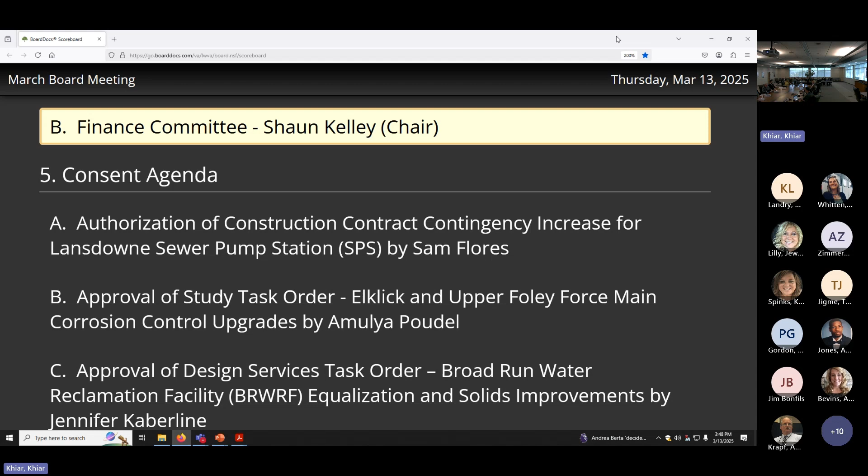Aye. I'm taking that. Aye. Oh, we have Mr. Bonfils, Mr. Bonfils, a voice from above.

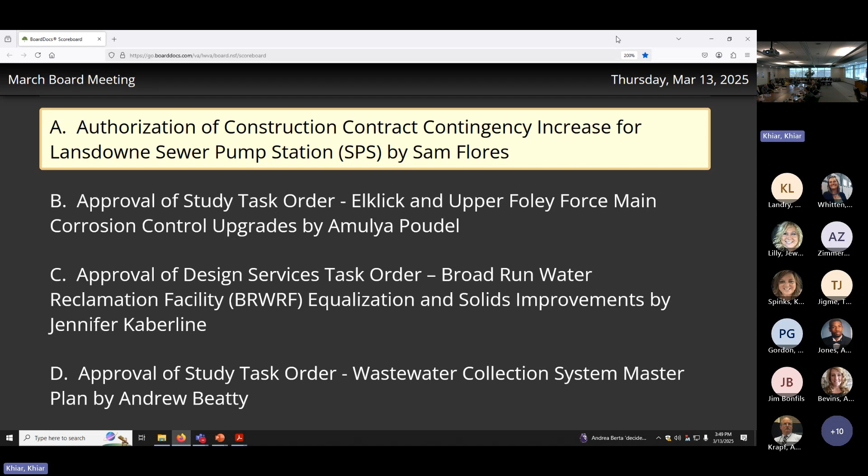Combined capital construction quarterly report, fourth quarter '24 change order report, and 2024 report by Mr. Zapfel and Mr. Flores. They look so close right there sitting with each other.

Thank you, Mr. Allen. Good afternoon. It's a privilege to come before the board to provide an encore presentation to our CIP committee meeting quarterly report for the fourth quarter of 2024.

I'll probably start by acknowledging that we are speaking about the fourth quarter here in March, and that's by virtue of some slippage on the typical committee meeting schedule. Rick and I will shortly start working on the Q1 report to provide for the committee here in April. But in fairness to keeping that one interesting, we will stay faithful to the reporting timeframe and avoid any spoilers, as it were, for what's gone on during the past couple of months here.

The agenda will include project snapshots, brief reports on the lab HVAC project at Broad Run, followed by the water booster station improvements at Dulles South, a little bit of a deeper dive on the Milestone Reservoir and Pump Station project, followed by Mr. Zapfel's presentation on the Broad Run Phase 2 expansion, and then lastly, some quarterly report facts and figures for Q4 of last year.

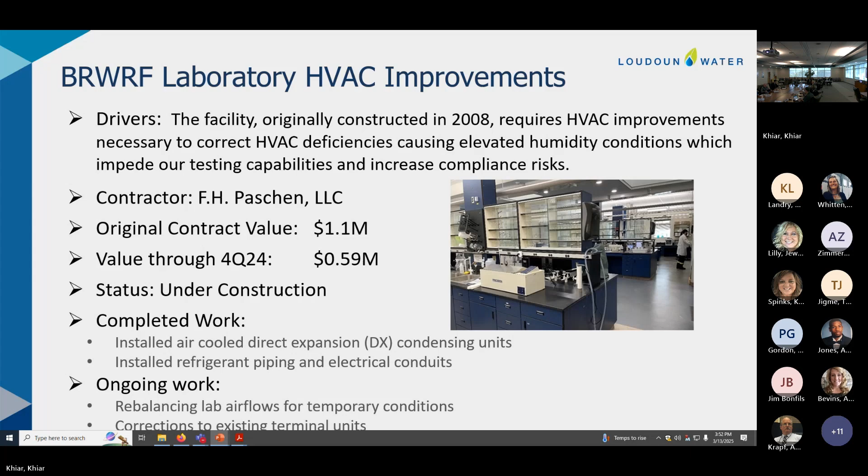The next project I'll present on is Dulles South Water Booster Pump Station upgrades. This one also started in the spring of last year. It's scheduled for completion around the fall of this year. On schedule so far, a little bit of a slower ramp up for this one due to some longer lead time items and some work we have to coordinate within certain seasonal constraints, but so far proceeding well on schedule and within the approved construction budget.

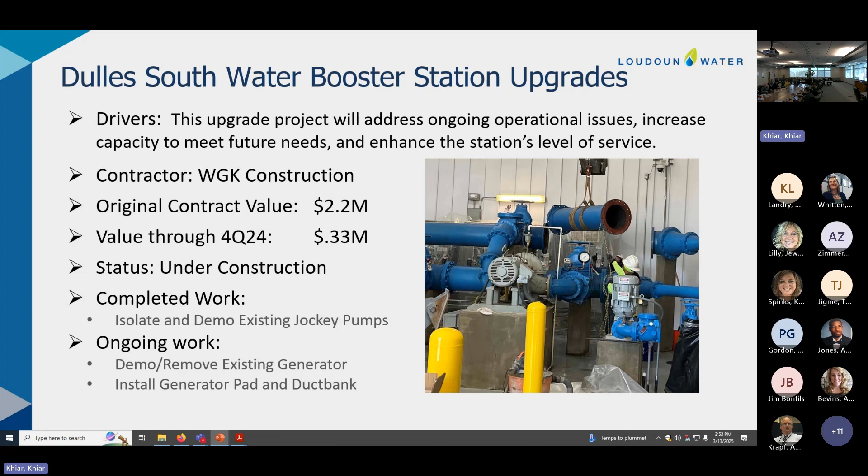All right, so now we'll kick things off with Milestone Reservoir and Pump Station, that deep dive that I promised you at the beginning. This one, roughly a year and a couple of months in, doing well, right on schedule. The critical path for this project is largely driven by the geotechnical work, the tunneling. While we have had some challenges in other aspects of the work, we've utilized the float that we have to react to those challenges and make improvements to those design and quality issues. But the overall scope and duration of the project remains as originally specified.

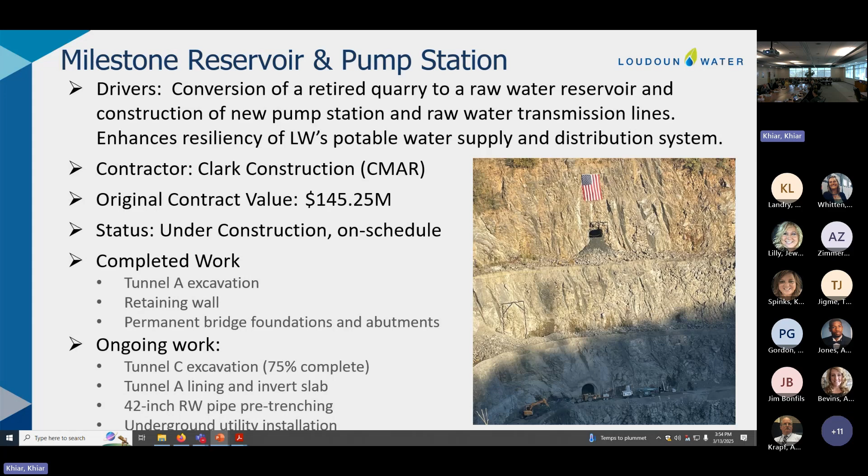So still on track for completion in 2028, around the spring, summer timeframe. We've now, as of the end of the reporting period, excavated all of Tunnel A, and we'll see a little bit more on that in the next set of slides here. We've completed some site improvements, some retaining walls, work on the foundations for the access bridge over Sickle Creek. We'll leave the rest of the updates on the ongoing work for our April CIP committee report.

But I'll say that things are generally still going very well on this project. Here's some figures on the original contract value and the change order total approved through the end of 2024. In the context of that value, our overall contingency for this project is around $7.26 million. So, if we extrapolate a little bit, we feel pretty confident that we should be able to complete the work within our contingency amount.

27% spent, over 23% time elapsed. And to echo a response to Mr. Sultan's questions from the CIP committee, the percent spent is reflective of some of that more expensive work associated with heavy civil and geotechnical mining efforts that has largely proceeded on schedule. So that's where that gap is expected to maybe converge as we start work on the pump station construction itself.

Any questions up to this point? Yes, I have one, Mr. Allen? So have we purchased all the pipes that we're going to be using in this project? So if I can venture, I guess, as to where you're going with this, Mr. Allen. With tariffs and things like that?

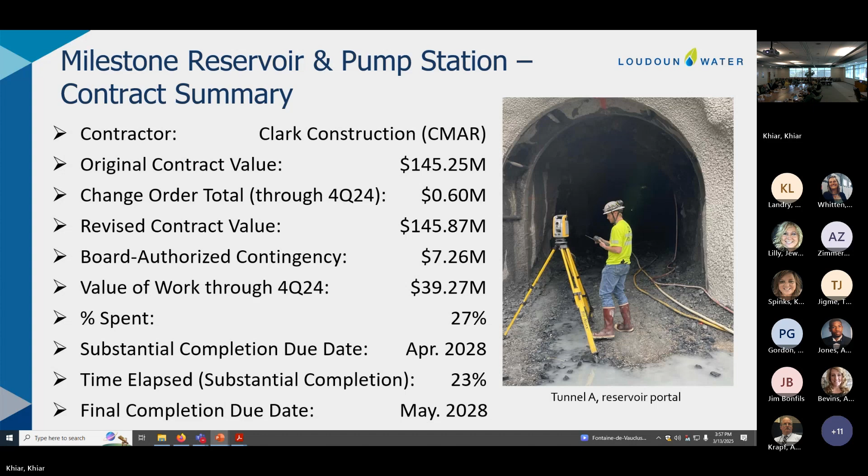So by and large, in the typical categories we report on every quarter, things are generally okay with regards to communication, efficiency, and coordination with operations. That's probably more of a factor when we start getting into commissioning during 2027 work. But the rest of the changes and change orders, aside from some administrative back and forth with the contractor to make sure all changes are properly justified, by and large we are doing pretty well in these categories.

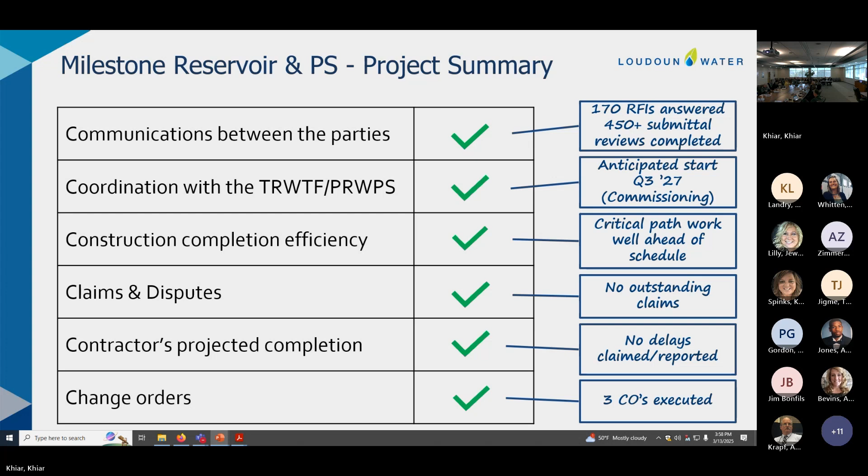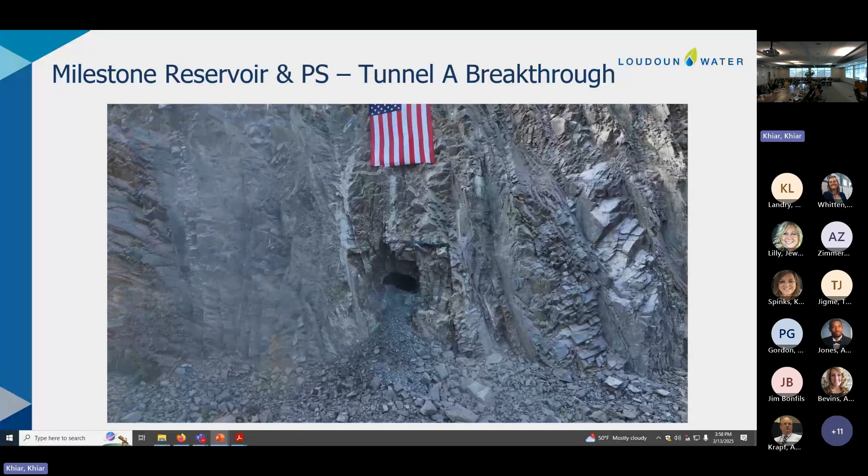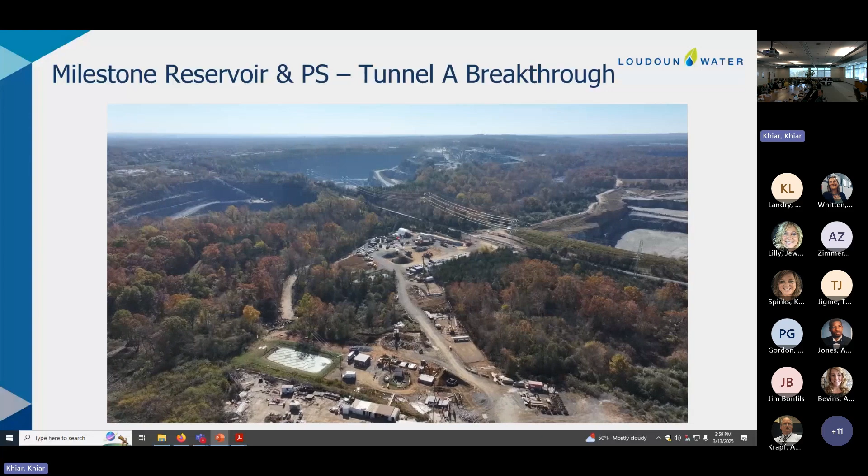So here's a video I incorporated into this report. It shows the moment of breakthrough at Tunnel A. The portal for Tunnel A is roughly 100 feet of depth from the top of that shaft for withdrawal to the pump station, and an overview of the project status, including dewatering at the quarry and the overall situation there. Pump station work has yet to really kick off, aside from some stub-up of the 42-inch raw water pipes that was started at the end of 2024, so we'll have more to show on the next report. You see here where the footprint of that pump station will be once it gets started, and you can catch a glimpse of the permanent bridge there and a little cameo from the GCIP project. That's my visual aid for this one.

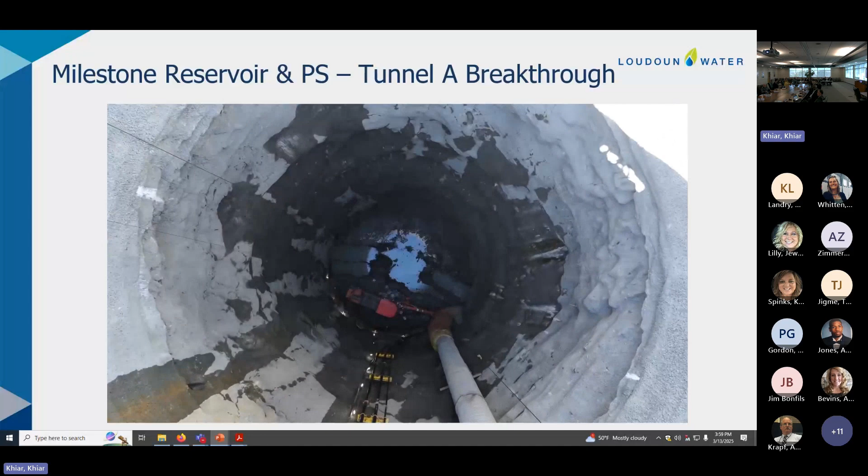And that's all I have, so I'll kick it over to Rick for the Broad Run report.

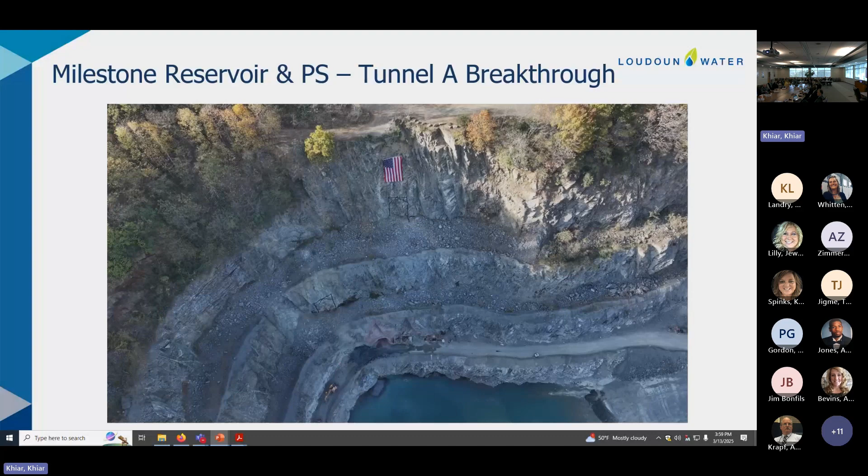All right, good afternoon. Moving over to the Broad Run Phase 2 expansion, these are the numbers through the end of the fourth quarter of last year. In general, these are the final numbers for the project at 100% spent. We've reached substantial completion, and we're in the time period between substantial and final completion. Just a note, substantial completion was achieved on November 22nd, the effective date of substantial completion.

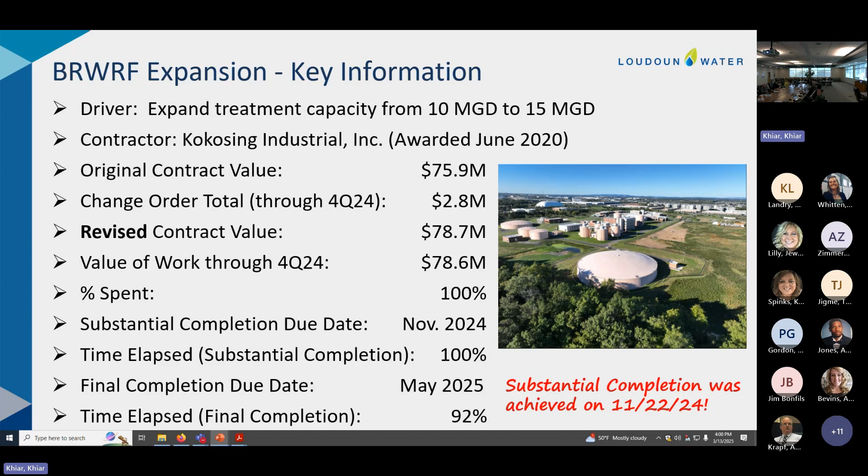And then just my colored graphic of the facility here. This is the completion view of the project through the end of the fourth quarter. Everything was complete as shown in green, except we had one portion of our thickening and dewatering building. There was one process that needed a little optimization by the vendor, and the vendor wasn't available until January, so that one was still yellow, but very close to green by the end of last year.

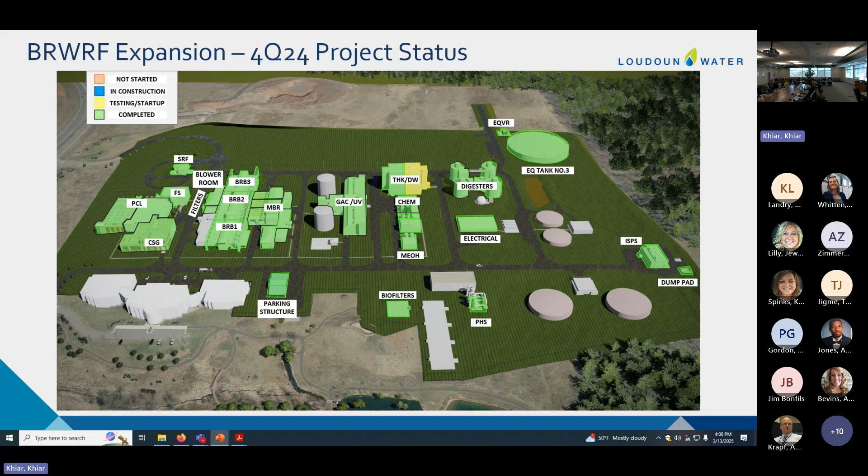Right, and here's some more final stats on the project. I'll call attention to a couple of these. The contractor's done a great job hitting the punch list items hard, and they're on track to finish the project by the final completion deadline, which is mid to late May of this year. Also, 15 change orders - we executed our last change order right at the end of the fourth quarter, and we don't anticipate any more on the project.

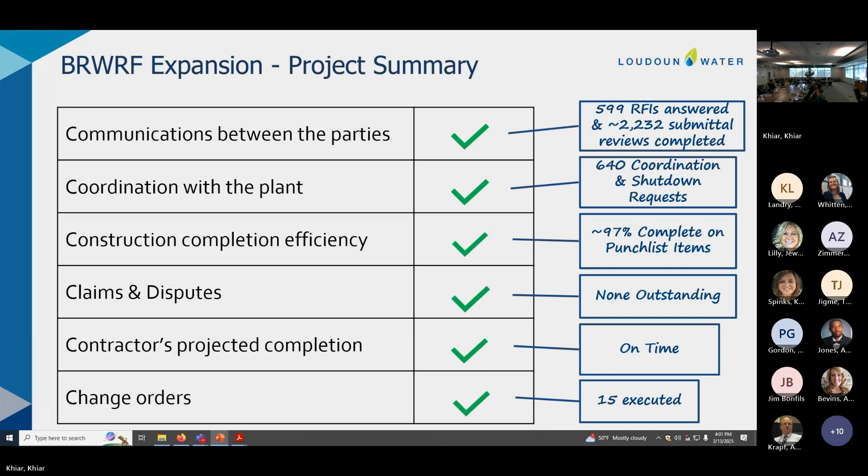Okay, and this is our list of active construction projects through the fourth quarter of last year. On the left, we've got our time, percent time complete, in the third column. And on the right, we've got our contract price information in the way of contingency utilized, change order percentages, and percent spent. Any questions on any of these projects?

Tackling some administrative challenges associated with some requirements, permitting mainly, that need to be wrapped up here. The challenge to our team is to work with the county to get these permits closed out by the end of March so we can report final completion in the next report.

Mr. Allen. We're anxious to put this one to rest. Sam, what are the permits? What are we arguing over? There was some additional inspection notes on the BMP stuff, some of the bio...

...ponds, if you will, associated with BMP on the project, some late adders to that work. That extended the time frame for permit approval associated with those features. We've recently wrapped up the work, end of February, beginning of March, and hopefully it's just now an administrative exercise to perform a final inspection and get those permits fully wrapped up. Was that like third round comment kind of stuff, or when was that? I don't have all the details in front of me, but it wasn't the first. Yeah, all right, well, I might talk to you after. Thank you, sounds good, thanks.

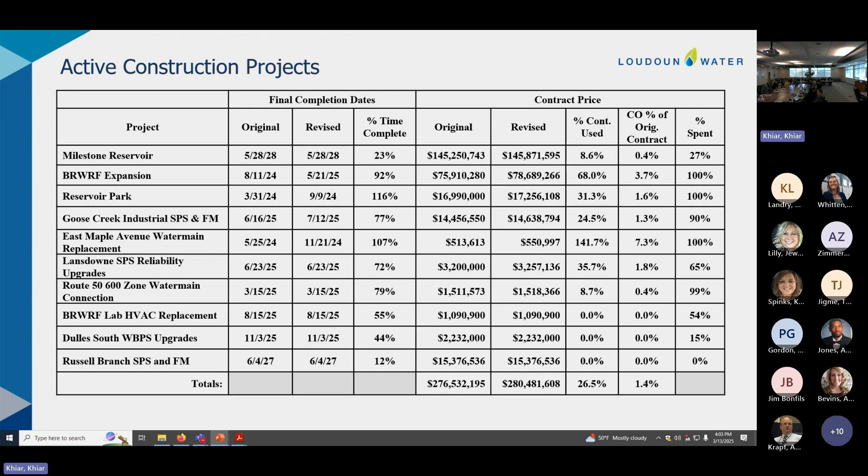Okay, we'll move on to the completed projects here. So in the fourth quarter, this roofing project reached final completion, and so this one will drop off the list, moving into the next quarterly presentation.

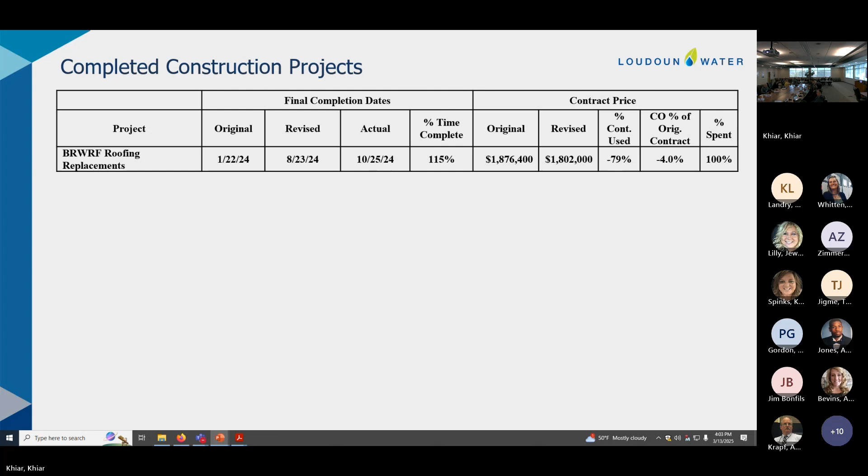Also, I want to say, it's a lot of work bringing all these construction projects online, on time, under budget. Great job on that, that's not an easy thing to do. Thank you, and I'll say hats off to the Broad Run Phase 2 project team, the Loudoun Water staff, the engineer, even the contractor. It was a great collaborative effort, and I think it brought home a very good outcome. Great job.

I don't have any videos this time. In the future, I might though.

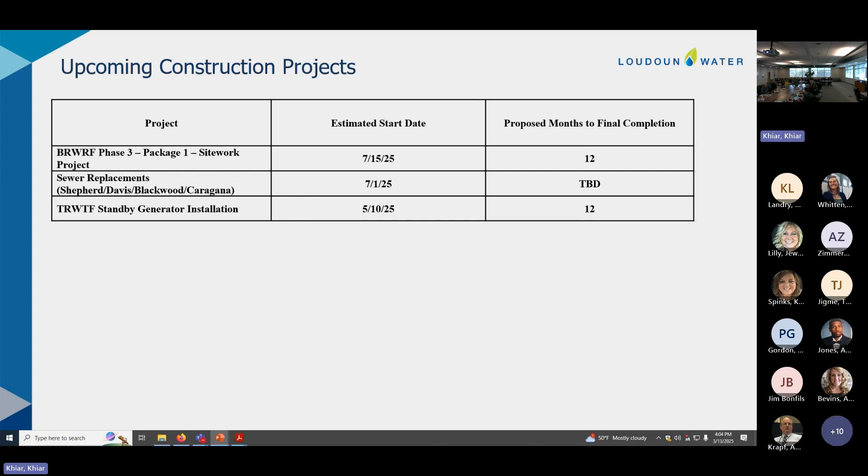Good afternoon, everyone. These are January results, and as you can see at the top, they are draft. These were reviewed at the Finance Committee. Operating revenues totaled 10.3 million, which was right on forecast.

The non-operating revenues are ahead because of the ERCs that we had expected in December that rolled into January. Expenses are slightly higher, but that's just due to timing because we had 3 payrolls in January versus our budget plan, which has them sometimes in February. Capital contributions totaled 32.5 million.

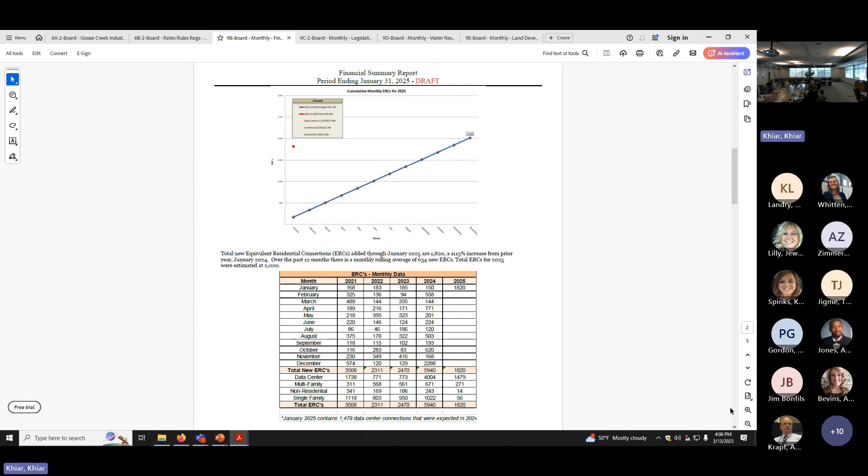Next page, please. There's our ERCs, so that's where you see the red dot. We have made this bigger for you next month, Mr. Buffington, so hopefully you'll be able to see it. So adjusted, we're about right on track with the trend if we back out those 1,400 connections in January.

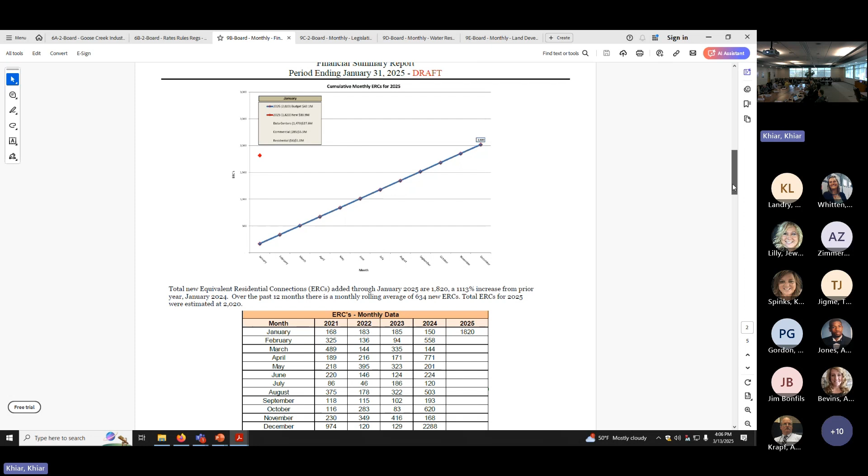And then next page, we'll show you that they were mostly data center connections. So that's your blue all the way to the right there. And the blue on the bottom is the revenue we received in January.

And then final page will be our CIP spend. So as of January, we were at 117% of projection. But as you can see, there's no budget there. We usually phase the budget into February for the spend for the year. And that's it. Are there any questions?

Do you anticipate, because of all the chaos going on, the layoffs and whatever, that our finances are going to be affected, or we don't know yet? New connections, whatever, I don't anticipate that that will affect us. I mean, people still need water. Our investments are pretty stable with what we invest in, so even with the market jumping around, I don't think so.

I think it's one of the things that we've discussed internally as something we're focused on to monitor going forward. As Sam mentioned, we're meeting with contractors and vendors to hear what they're seeing from their side. I will say most recently for some of our positions, we've started to see folks with federal experience apply that typically we haven't seen. So maybe on that front we'll see a change, folks looking for employment coming here, but it is top of mind for us and something that we are keeping a close eye on.

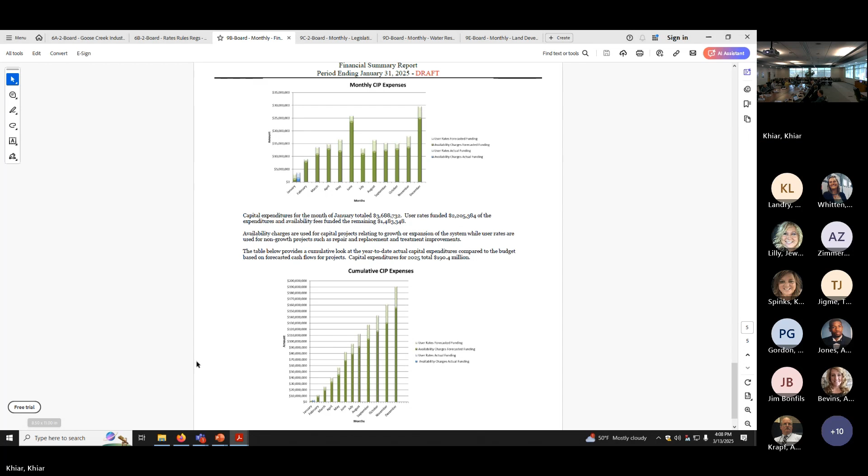Good afternoon. Pleased to provide an interim update on our legislative activities. The report that's attached provides the final status for bills working their way through the General Assembly. That session closed down on February 22nd, and we're currently in the period where the governor is reviewing that past legislation and making determinations whether to sign, amend, or veto. He will have until March 24th to make those determinations, not just for the budget bill, but for all normal pieces of legislation. We will provide a full legislative activities report wrap up at next month's session.

So this is just a single slide. We did want to highlight continuing activity. House Bill 2482, companion legislation Senate Bill 962, was ultimately passed out of the Senate and is making its way to the governor's office. We're continuing to engage on this bill. We highlighted this at last month's meeting as well. This puts forth an apprenticeship requirement for complex projects that would be delivered by public bodies.

VWWA, VAMWA, which are the two associations that we're most active with, have formed a coalition with Rural Water Association, Municipal Drinking Water Association, and the Municipal Stormwater Association to issue a joint letter to the administration seeking exemption for complex projects in that water space. Failing that, this item could be referred to the Public Procurement Study Work Group. Given the delayed enactment clause of July 2026, it does create some space for modification to this bill.

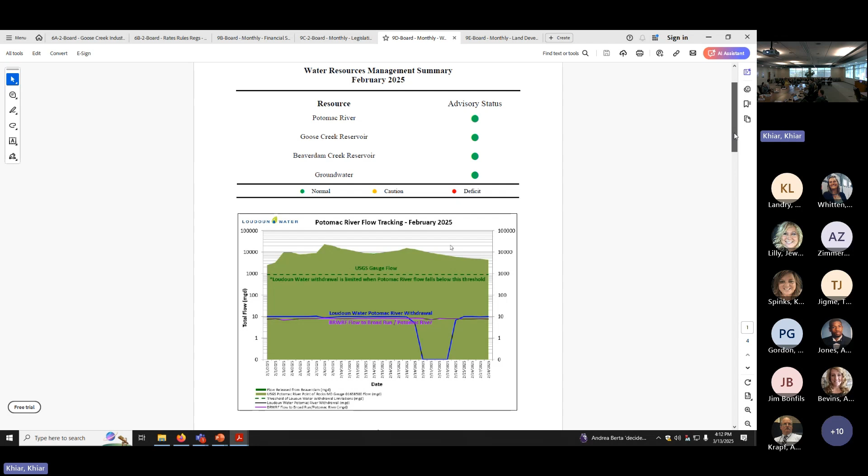Thank you. Do we have any issues at all with ice back a couple months ago? We didn't have any issues, but we definitely noticed it. We took all precautions that we could to keep it from impacting us, but it was the first time we've seen that much ice around our intake.

I didn't think about that, that's a good question. Our intake's not very far below the surface, right? Right, can be pretty close to the surface. Yeah, a big iceberg could come down and hit that. Is there generally a concrete diverter in front of it so that logs and things get pushed away? Yeah, it gets pushed away, and generally you can see where the intake screens are. Those don't get frozen, but we call it frazil ice, it's like little fingers of ice that come around it. So we did see that quite a bit this year.

And then I don't mean to put you on the spot, but how are we doing with recharge? It seems like we've had a consistent drought for years. How did we end 2024? Were we below? I think we get 42 inches of rain a year, are we still trending below? We are trending below. Overall precipitation in our basin is below, yes, around I think 11 inches below.

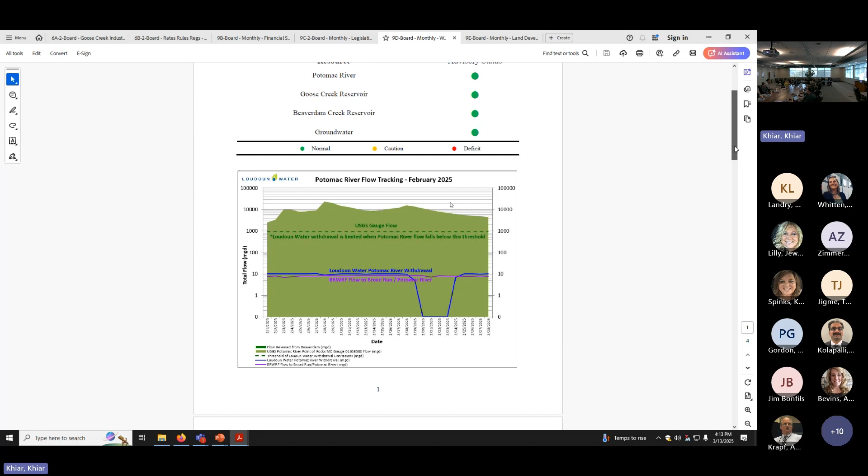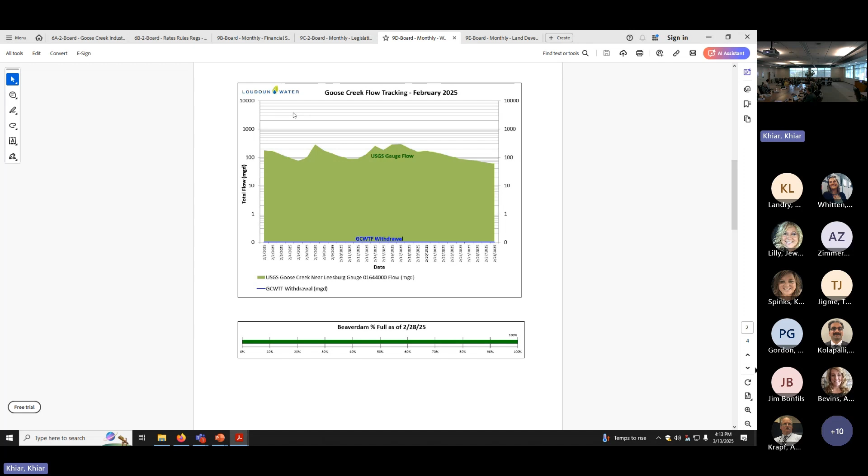All right, thank you. With the heavy snowfall, are we seeing any impact from de-icing and salting of roads that VDOT implemented during the two large snowstorms, is it noticeable? It's not noticeable, we didn't notice any uptick in chloride. So I think everything went smoothly, it seems like the outreach is going well. But we do regionally monitor that, so there is a very active group regionally keeping track of what's going on in that part.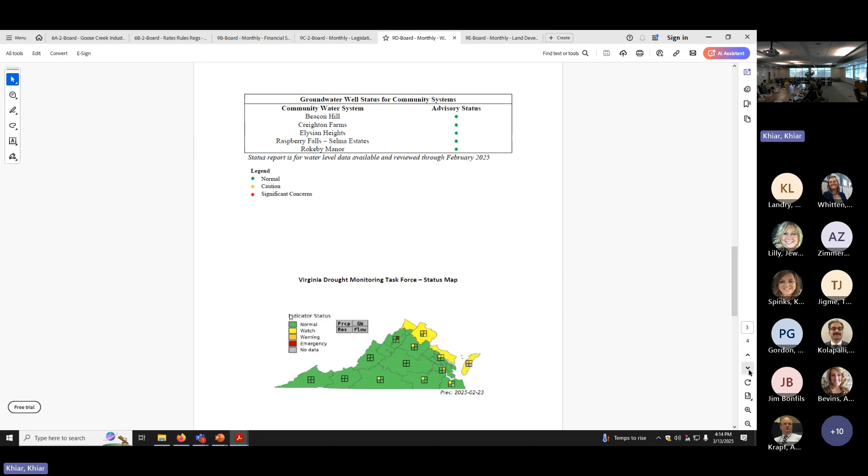Question: don't we have a bubbler system around the intake to control it? Yes, which helps. So we keep that running for the ice and for the sediment. We love our bubbler system.

All right, anyone else have any questions? Thank you. The last report is water and sewer agreements by Mr. Tran.

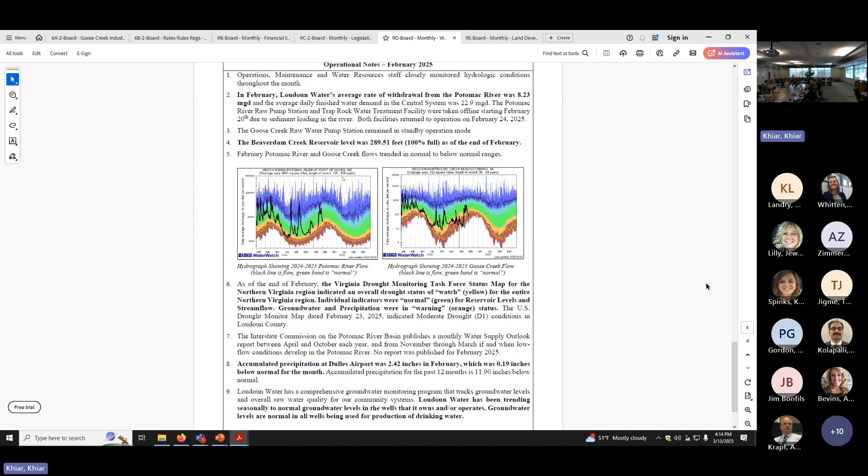This is Mr. Vega's report. I'll say that for next, however long I live. Does anyone have any questions for Mr. Tran? Let's see it.

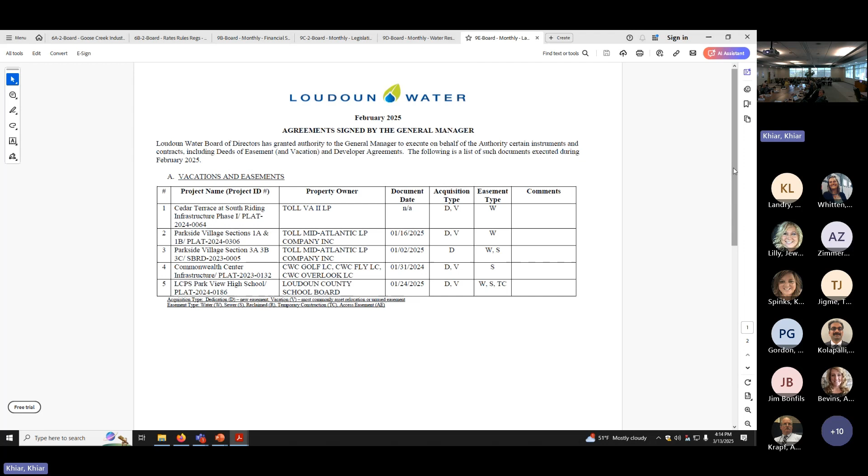You go down to the second page. Nothing to note regarding the easements and vacations. We just had one developer agreement that had a small amount of reimbursement, and the first phase got divided up into two phases. So we had to do an amendment for the first phase to reduce the reimbursement amount, and then the second phase had the remainder reimbursement amount, but it's relatively small.

Any questions? I imagine this still gets very positive feedback from the developers that are upsizing to our benefit. Yeah, especially around this time because that's when they get the reimbursement checks.